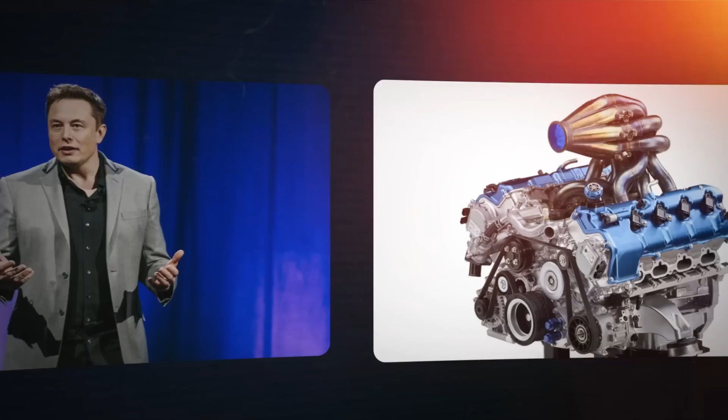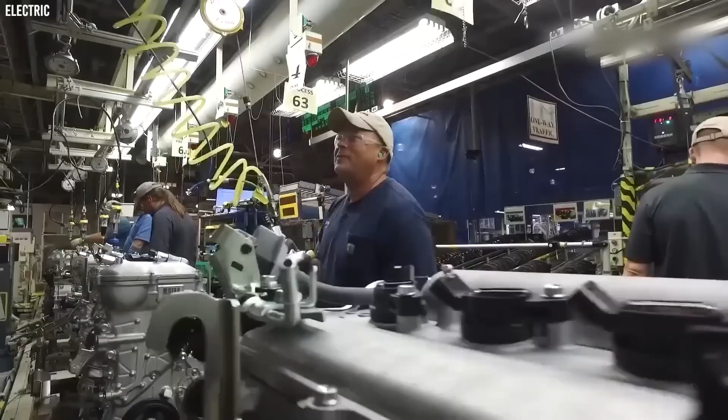In a groundbreaking announcement, Elon Musk has unveiled a revolutionary new water engine that promises to transform the future of transportation and energy. After years of skepticism and countless innovations, Musk's latest venture sets the stage for unprecedented environmental sustainability. But what makes this water engine so unique, and how will it impact our world? Join us as we dig into the mechanics of Musk's incredible invention and explore the far-reaching implications of this game-changing technology.

Elon Musk abruptly announced a big change in Tesla's course on X, formerly known as Twitter, in an unexpected turn of events. Following years of doubt regarding hydrogen fuel cells, Musk declared that Tesla will switch from battery power to hydrogen power, which represented a significant shift in the business plan. This announcement caught many by surprise, given Musk's previous criticism of hydrogen fuel cells, which he famously called 'fool cells.'

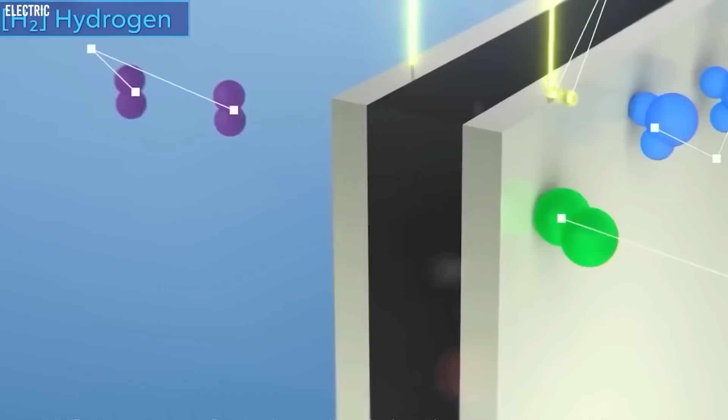The shift was driven by challenges faced in mass-producing the 4680 battery cells, prompting Tesla to reconsider its approach to sustainable energy solutions. But Musk didn't stop there. He revealed that Tesla's latest innovation, the revolutionary water engine, would be at the forefront of this transition. This groundbreaking technology promises to redefine how we think about engines, offering unprecedented environmental benefits and performance.

So what makes this water engine so revolutionary? How will it impact the automotive industry and beyond?

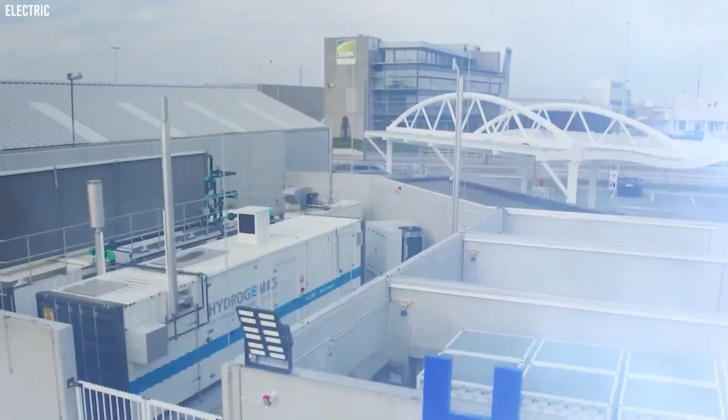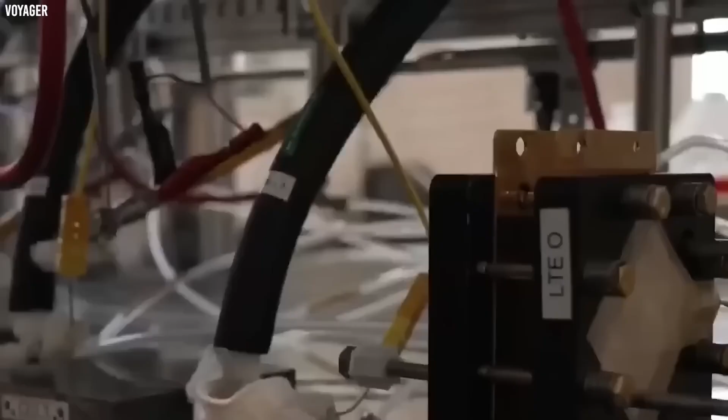Elon Musk, the visionary behind Tesla and SpaceX, has always been driven by a commitment to cutting-edge technology and environmental sustainability. His goal is to create a future where technology enhances our lives while protecting the planet. Musk's relentless pursuit of innovation has consistently pushed the boundaries of what's possible, earning him a reputation as a modern-day pioneer.

Musk's vision for Tesla wasn't just about creating electric cars, but about transforming the entire automotive industry. He aimed to prove that electric vehicles could be faster, safer, and more enjoyable to drive than their gasoline counterparts. This mission was about more than just cars - it was about accelerating the world's transition to sustainable energy.

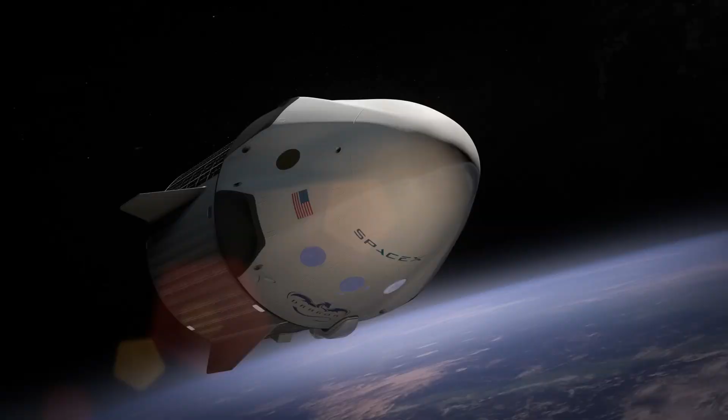With SpaceX, Musk's ambitions extended beyond Earth. He envisioned making space travel more affordable and accessible, ultimately aiming to colonize Mars. SpaceX's achievements, such as the successful landing and reuse of rockets, have revolutionized the space industry, demonstrating Musk's ability to turn ambitious dreams into reality.

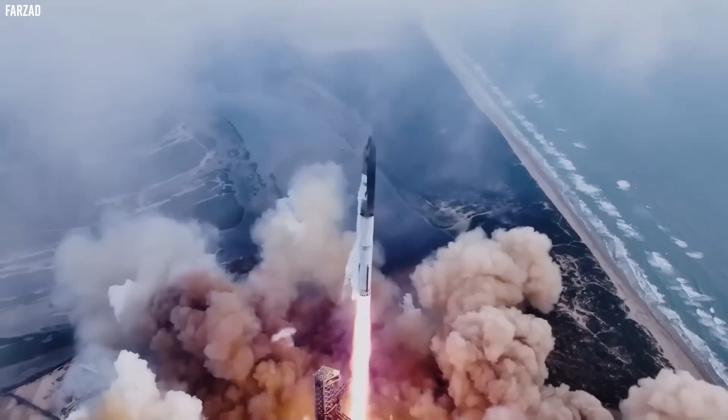Musk's journey in renewable energy and transportation is marked by several key milestones. Tesla, founded in 2003, initially faced skepticism - electric cars were considered impractical and inefficient. Musk's perseverance paid off. The Roadster, Tesla's first vehicle, showcased the potential of electric cars with its impressive performance and range.

The subsequent releases of the Model S, Model X, Model 3, and Model Y have solidified Tesla's position as a leader in the electric vehicle market. Each model brought advancements in battery technology, driving range, and autonomous driving capabilities, making electric cars increasingly viable for everyday use.

Beyond vehicles, Musk's contributions to renewable energy are significant. Tesla's Powerwall and solar roof products are designed to create a sustainable energy ecosystem for homes and businesses. By integrating solar energy generation with efficient energy storage, Musk has provided practical solutions for reducing dependence on fossil fuels.

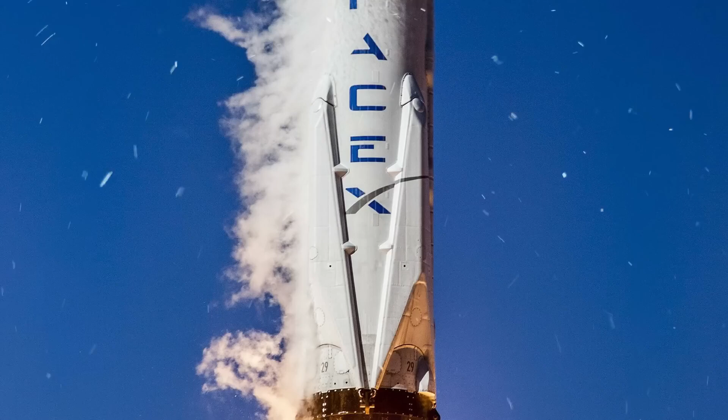In the realm of space travel, SpaceX has achieved remarkable milestones. The Falcon 9 rocket's ability to land and be reused has dramatically reduced the cost of space missions. The successful deployment of the Starlink satellite constellation aims to provide global internet coverage, further emphasizing Musk's far-reaching impact on technology and innovation.

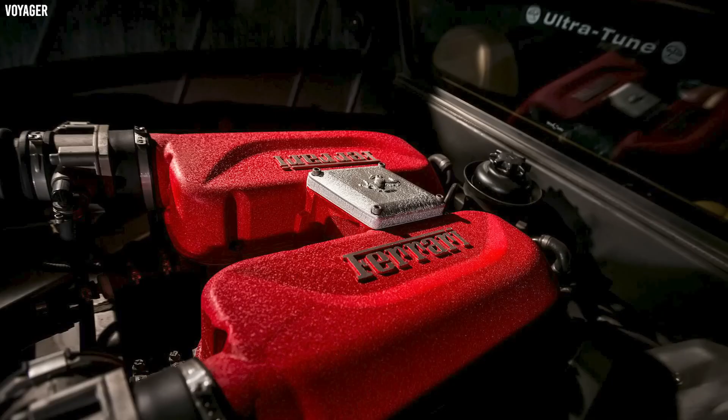The water engine operates on a simple yet ingenious principle: it uses water to generate energy. This process fundamentally separates it from traditional combustion engines, which rely on burning fossil fuels, and from electric engines that depend on battery power. But how does the water engine work?

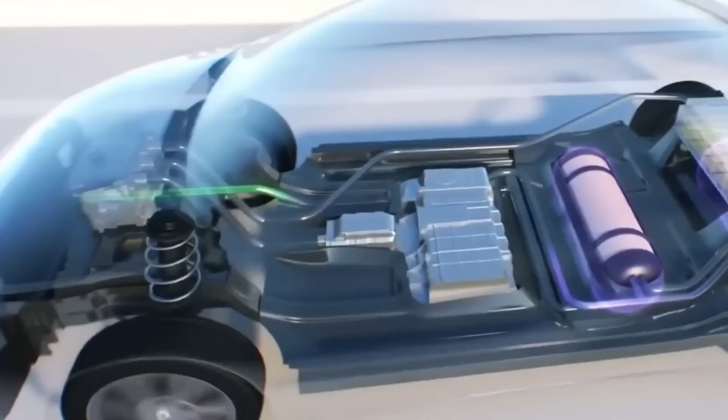At its core, the engine uses a method called reverse electrolysis. In conventional electrolysis, electricity is used to split water, H2O, into hydrogen, H, and oxygen, O. In reverse electrolysis, the process is flipped - hydrogen and oxygen are combined to produce electricity, and the only byproduct is water vapor, making this an exceptionally clean technology.

So what are the mechanics behind this impressive technology? The water engine's mechanics are a blend of fuel cells, reverse electrolysis, and hydrogen-oxygen reactions. Let's break it down step by step. First, water is introduced into the system. The engine then splits the water into hydrogen and oxygen using an initial energy input. These gases are stored in separate tanks within the vehicle.

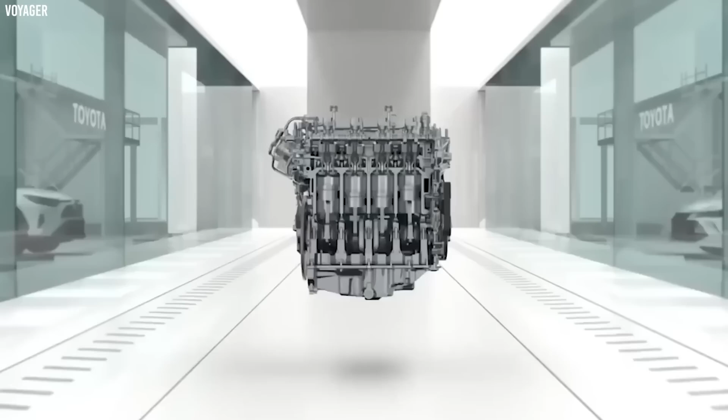When the engine is running, hydrogen from the tank is fed into the fuel cell. In the fuel cell, hydrogen molecules are split into protons and electrons. The electrons are used to create an electric current, which powers the vehicle's electric motor.

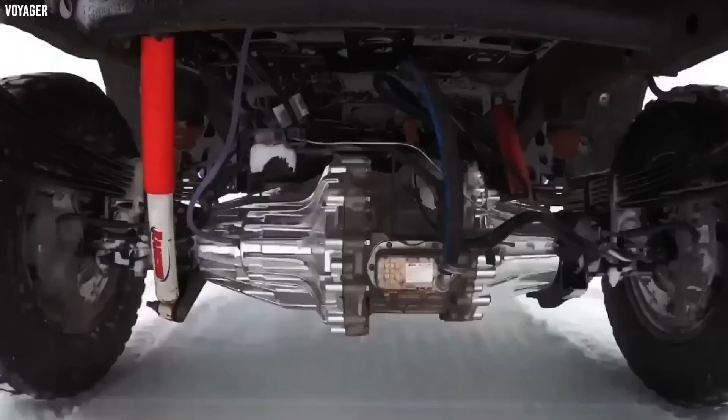Meanwhile, the protons move through a membrane and combine with oxygen from the air, producing water vapor as the only emission. This process is incredibly efficient, continuously generating electricity as long as there is hydrogen and oxygen available.

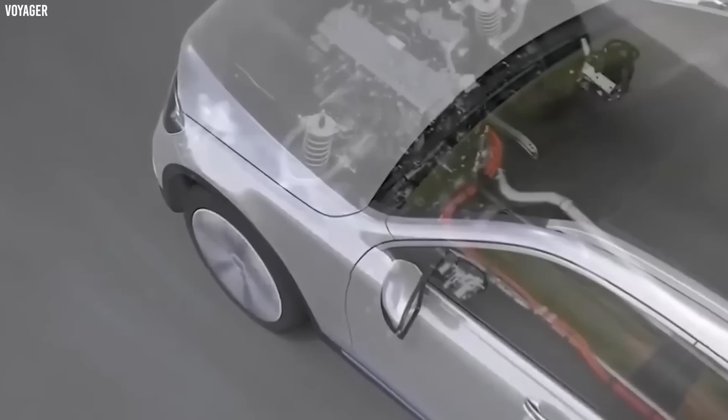But how efficient is the water engine compared to traditional and electric engines? The answer is quite promising. Traditional combustion engines have an efficiency rate of about 20 to 30%, meaning a significant amount of energy is lost as heat. Electric engines, while more efficient at around 85 to 90%, still face challenges like long charging times and battery degradation. The water engine, however, boasts an efficiency of approximately 60%, placing it between combustion and electric engines.

More importantly, it offers a cleaner, more sustainable alternative. Another critical performance metric is range. Traditional electric vehicles, EVs, often suffer from range anxiety, with current models typically offering between 200 to 300 miles per charge.

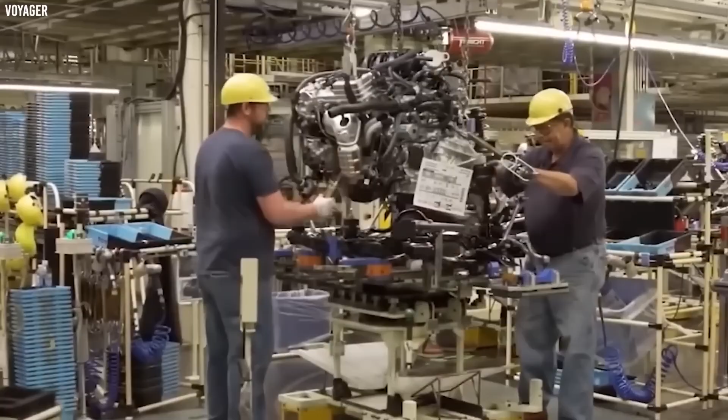The water engine, leveraging the high energy density of hydrogen, can achieve ranges comparable to or even exceeding those of fossil fuel-powered vehicles. Imagine driving a car that emits only water vapor and never worrying about running out of power in the middle of a trip.

So, what makes the water engine so unique? Unlike electric vehicles that require lengthy charging sessions, the water engine can be refueled quickly, similar to gasoline vehicles. This convenience, combined with its environmental benefits, positions the water engine as a game changer in the automotive industry.

One of the most significant advantages of the water engine is its potential to drastically reduce our carbon footprint. Traditional combustion engines emit large amounts of carbon dioxide and other pollutants, contributing to climate change and air pollution. In contrast, the water engine produces only water vapor as a byproduct, making it an exceptionally clean alternative.

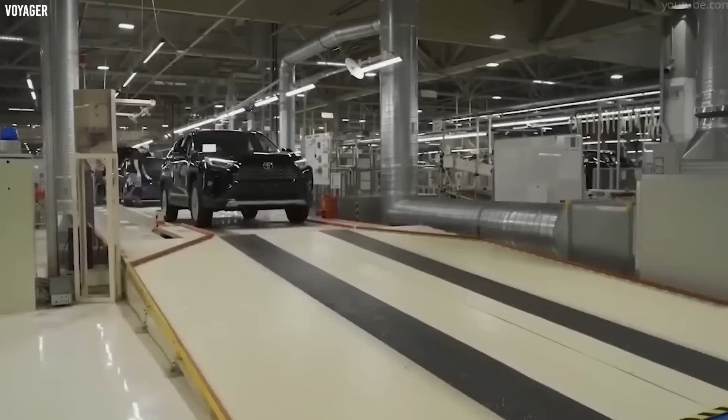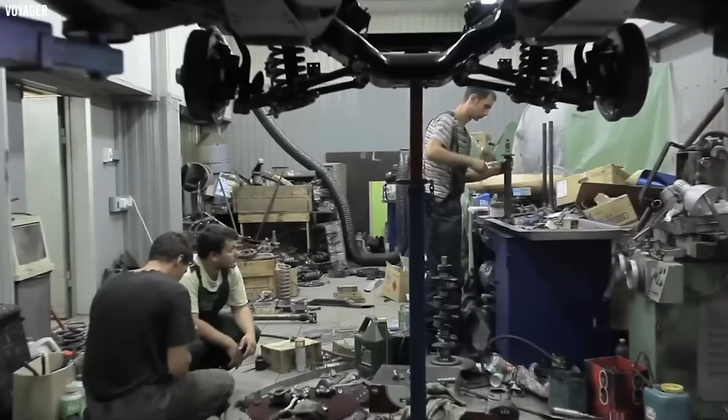To put this into perspective, the average gasoline-powered car emits about 4.6 metric tons of carbon dioxide annually. Transitioning to water engines could eliminate these emissions entirely. Moreover, the elimination of nitrogen oxides and particulate matter would lead to significant improvements in air quality, particularly in urban areas. Comparatively, electric vehicles, EVs, are also cleaner than fossil fuel-powered cars, but are not without their environmental costs.

The mining of lithium, cobalt, and other rare earth metals required for batteries has substantial ecological impacts. Additionally, if the electricity used to charge EVs is sourced from non-renewable power plants, the overall reduction in carbon emissions is less pronounced. Hydrogen fuel cells represent another clean alternative,

producing only water as a byproduct. The production of hydrogen typically involves natural gas, resulting in indirect carbon emissions. Additionally, hydrogen storage and transportation pose challenges due to its low energy density and the need for high-pressure tanks.

The water engine, utilizing reverse electrolysis, has the potential to offer a more efficient and environmentally friendly solution. By using renewable energy sources to produce hydrogen, the entire life cycle of the water engine becomes sustainable, further reducing its environmental footprint. Economically, the water engine could bring substantial cost savings in the long run.

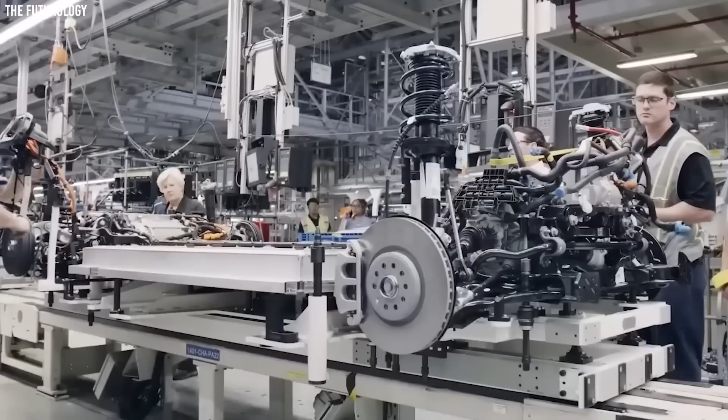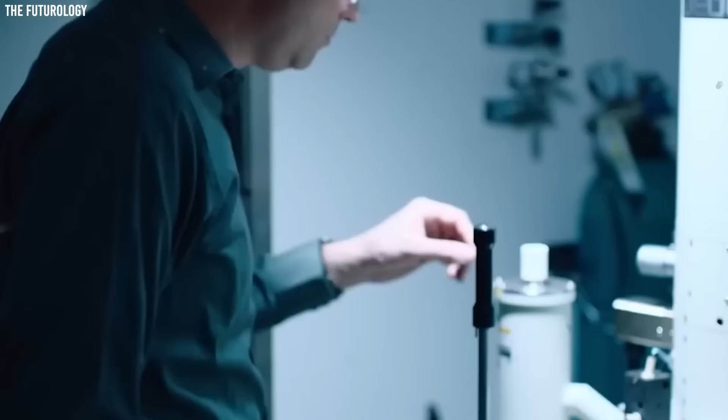Traditional internal combustion engines require regular maintenance, including oil changes, exhaust system repairs, and engine tune-ups, which can be expensive over time. Electric vehicles have fewer moving parts, reducing maintenance costs, but still require battery replacements, which can be costly and environmentally taxing. The water engine, with its simpler mechanics and fewer moving parts, promises even lower maintenance costs.

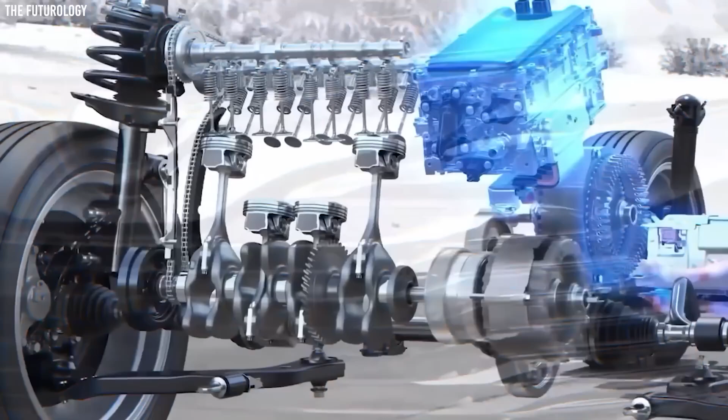Components like fuel cells and electrolysis systems are designed for durability, potentially extending the lifespan of vehicles. As the technology matures and economies of scale are realized, the initial cost of water engine vehicles could decrease significantly, making them more accessible to the average consumer.

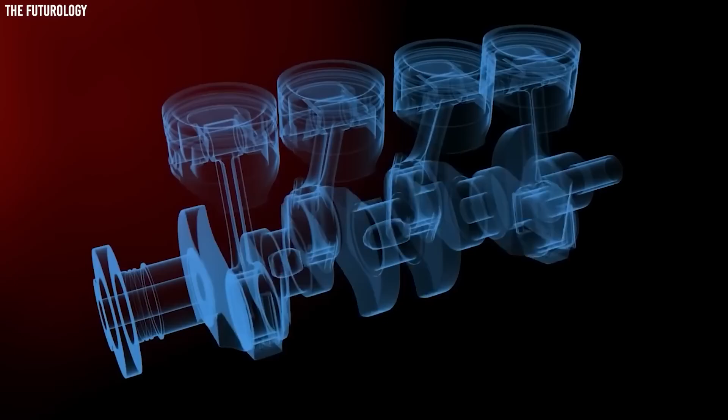However, the transition to water engines will require significant initial investment. Developing the infrastructure for water refueling stations is a massive undertaking. This involves either building new stations or retrofitting existing ones to accommodate water refueling technology. The cost and logistics of establishing a widespread network of refueling stations will require substantial collaboration between governments and private companies.

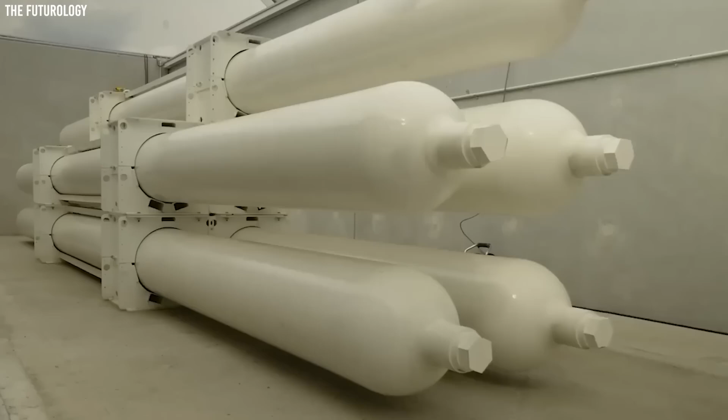On a broader economic scale, the adoption of water engines could reduce global dependence on oil, leading to more stable fuel prices and potentially reducing geopolitical tensions linked to oil supply. This shift could stimulate job creation in new industries focused on water engine technology, manufacturing, and infrastructure development.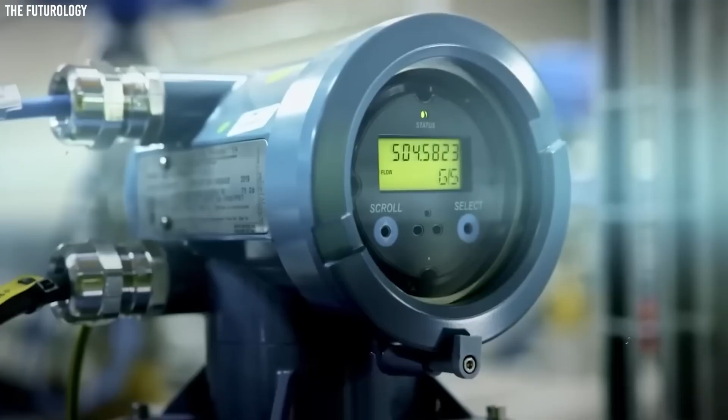The introduction of the water engine represents a significant technological shift in the automotive industry. Transitioning from combustion engines and electric vehicles to water engines involves overcoming various challenges. The current automotive infrastructure is fully rooted in fossil fuels, from manufacturing processes to refueling networks.

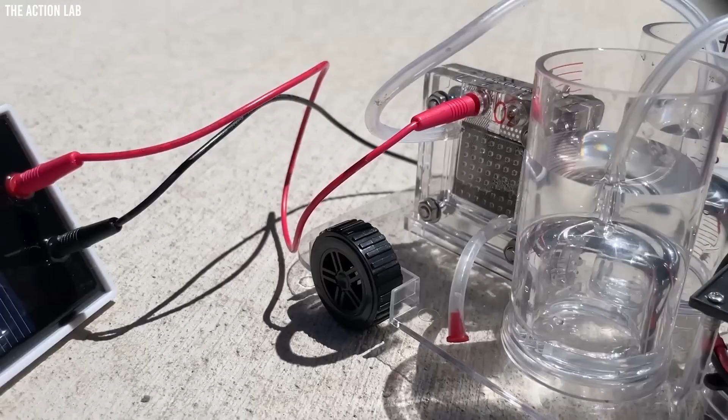To address these challenges, companies can leverage existing technologies and expertise. For example, many principles from hydrogen fuel cell technology, such as fuel cell design and hydrogen storage, can be applied to water engines. This can facilitate faster development and deployment of the new technology. But what does the future hold for Musk's water engine?

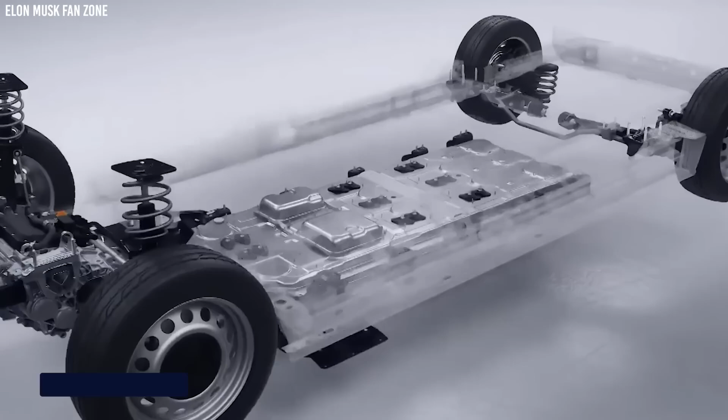Will it redefine our approach to energy and transportation, or will it face insurmountable obstacles? The automotive industry has watched Musk's announcement with keen interest. Major players like Toyota and Hyundai, longtime advocates of hydrogen fuel cell technology, have had mixed reactions.

They see it as a positive step towards wider acceptance and investment in hydrogen infrastructure. Hyundai, on the other hand, is cautiously optimistic, recognizing the competitive push, but also the significant market development needed to support both hydrogen and water engine technologies.

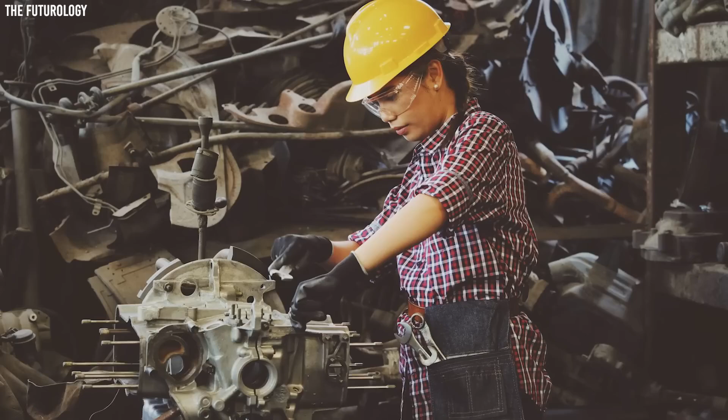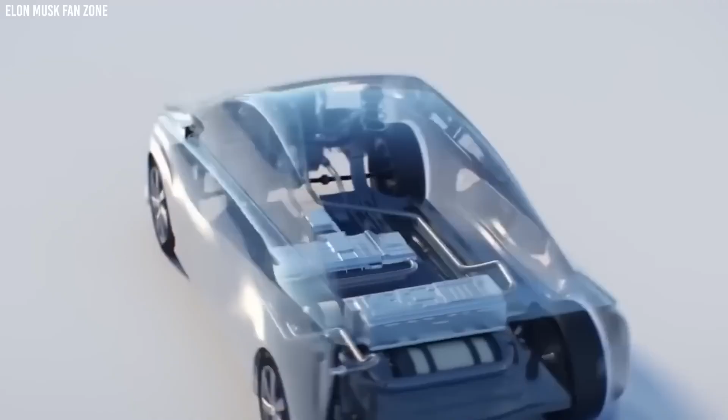The feasibility of the water engine has been discussed by analysts and industry specialists. While some regard it as a groundbreaking move that could hasten the switch to sustainable energy, others are dubious about the real-world difficulties. The technology's efficiency, the infrastructure needed for water refueling, and the viability of widespread adoption economically are among the issues raised. Public reaction to Musk's announcement has been a mix of excitement, curiosity, and skepticism.

Social media platforms have been abuzz with discussions as followers of Musk and Tesla enthusiasts express their anticipation for the new technology. Many are intrigued by the promise of a cleaner, more efficient engine and the potential environmental benefits. However, there are also doubts and concerns.

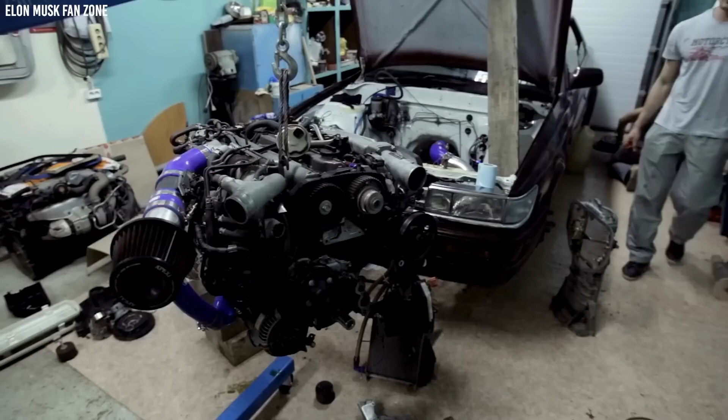Some critics point out Musk's past criticisms of hydrogen and question the feasibility of a rapid transition to water engines. They worry about the practicality of building a new refueling infrastructure and the initial costs associated with adopting the technology. So, will Musk's water engine prove to be the game changer it promises?

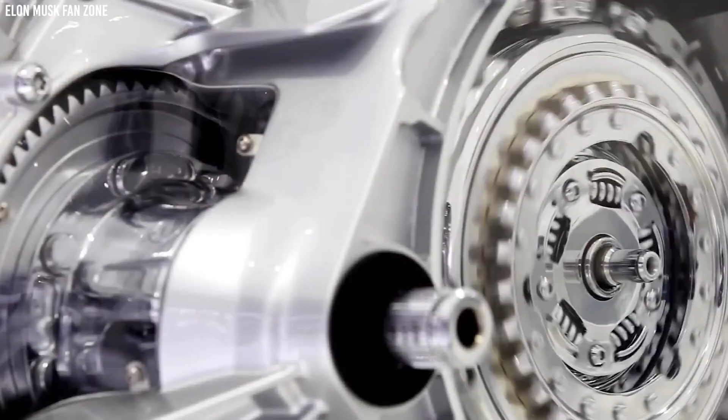One of the most significant challenges in deploying the water engine is the development of a comprehensive refueling infrastructure. Currently, the infrastructure for traditional fossil fuels is extensive, with gas stations available in almost every corner of the globe. Electric vehicle charging networks are also expanding rapidly, thanks in large part to investments by Tesla and other companies.

In contrast, the infrastructure for hydrogen fuel cells is still in its infancy. There are relatively few hydrogen refueling stations worldwide, concentrated mainly in specific regions like California, Japan, and parts of Europe. For water engines, which rely on a similar hydrogen-based refueling process, this existing network provides a starting point, but significant expansion is required.

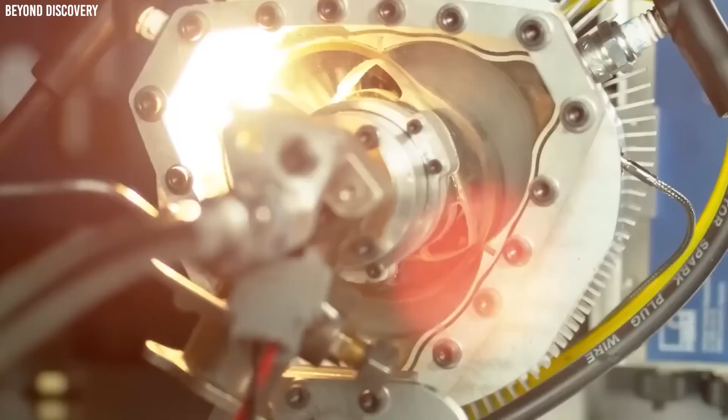Tesla's approach to solving this involves leveraging its experience in building out EV supercharging stations. The company plans to retrofit existing EV stations with hydrogen refueling capabilities and build new stations dedicated to water engines. This ambitious plan will require substantial investment and collaboration with governments and private sector partners to ensure widespread availability and convenience for consumers.

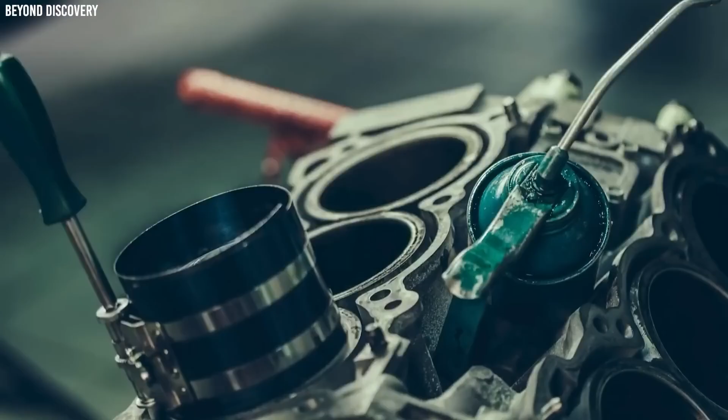But how quickly can this network be established? What are the logistical and financial hurdles that need to be overcome? These questions are critical as Tesla moves forward with its water engine rollout.

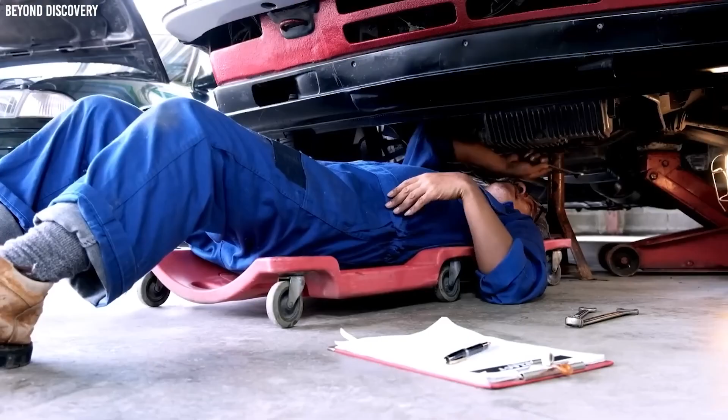Safety is another paramount concern when introducing a new technology. Hydrogen, while a clean energy source, is highly flammable and must be handled with care. The water engine, relying on hydrogen, inherits these safety challenges.

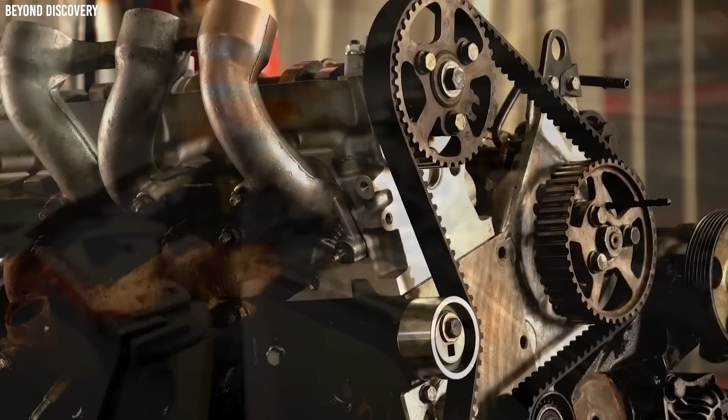To address these potential risks, Tesla has implemented several safety measures. First, advanced hydrogen storage systems have been developed to ensure that hydrogen is stored safely and securely within the vehicle. These systems are designed to withstand high pressure and prevent leaks.

Tesla's rigorous testing procedures for the water engine and hydrogen storage systems aim to meet and exceed safety standards set by international regulatory bodies. By prioritizing safety at every stage of development and deployment, Tesla is committed to making the water engine as reliable and secure as possible.

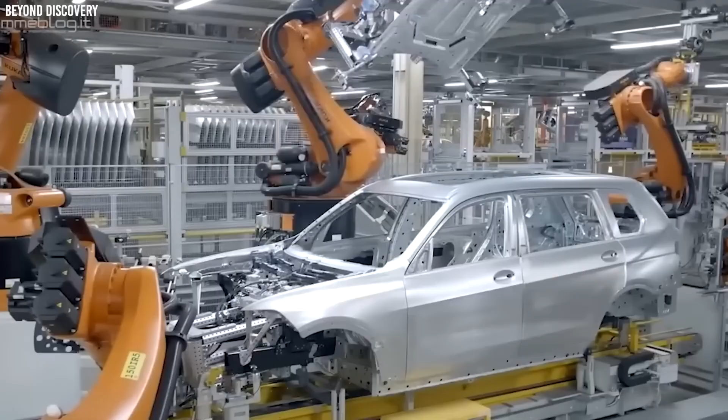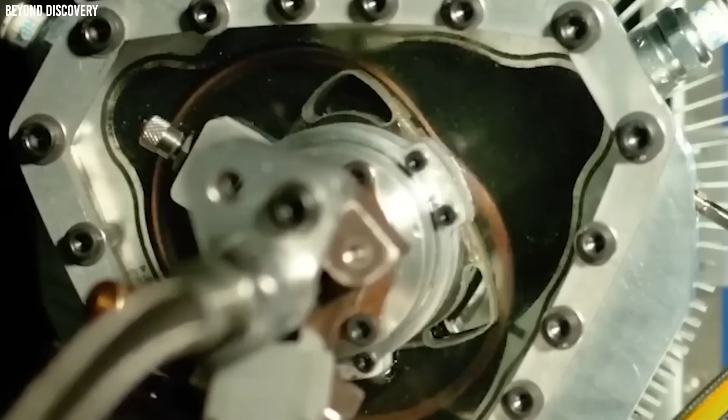But can these safety measures alleviate public concerns? What additional steps can be taken to ensure the technology is perceived as safe and trustworthy?

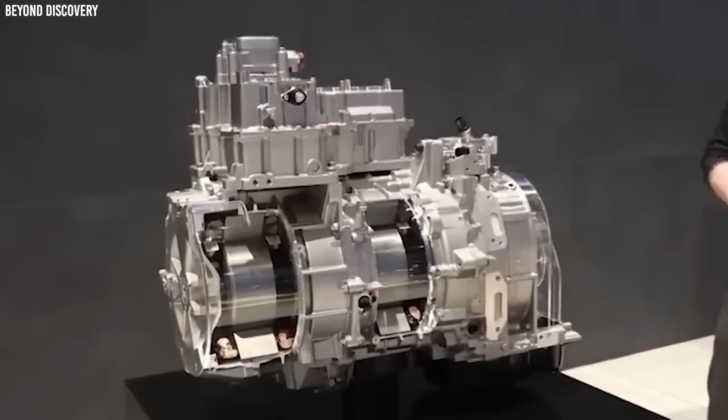Navigating the complex legal and regulatory landscape is another significant challenge for Tesla's water engine. Different countries have varying regulations regarding the production, storage, and transportation of hydrogen, adding layers of complexity to the global rollout of this technology. Tesla has proactively engaged with regulatory authorities worldwide to ensure compliance with all relevant standards.

This involves extensive documentation, rigorous testing, and ongoing dialogue with regulators to address any concerns and adapt to evolving requirements. These efforts are crucial in overcoming regulatory hurdles, but what are the specific challenges in different regions? How will Tesla's proactive approach influence the adoption of this new technology on a global scale?

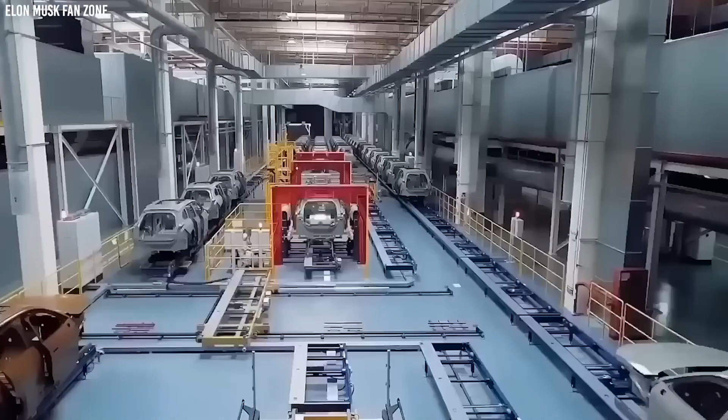Each technology has its unique strengths and weaknesses. Hydrogen fuel cells offer high energy density, allowing for long driving ranges and quick refueling times. They emit only water vapor, making them environmentally friendly. However, challenges arise in producing, storing, and transporting hydrogen gas, which is highly flammable and requires specialized infrastructure.

Water engines present a notable advantage with on-demand hydrogen production, potentially simplifying storage and minimizing risks associated with hydrogen gas handling. Additionally, this method can integrate well with renewable energy sources, enhancing sustainability.

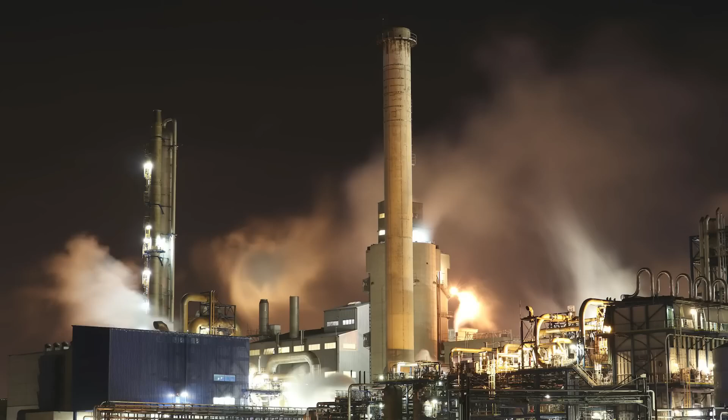However, the electrolysis process requires significant initial energy input, which can affect overall efficiency.

The market potential for water engines appears promising but challenging. The automotive industry is keen on reducing carbon emissions and adopting sustainable energy sources. Governments worldwide are setting strict emissions targets and offering incentives for clean energy technologies, creating a favorable environment for innovation. Forecasting adoption rates involves evaluating technological advancements, infrastructure development, and consumer acceptance.

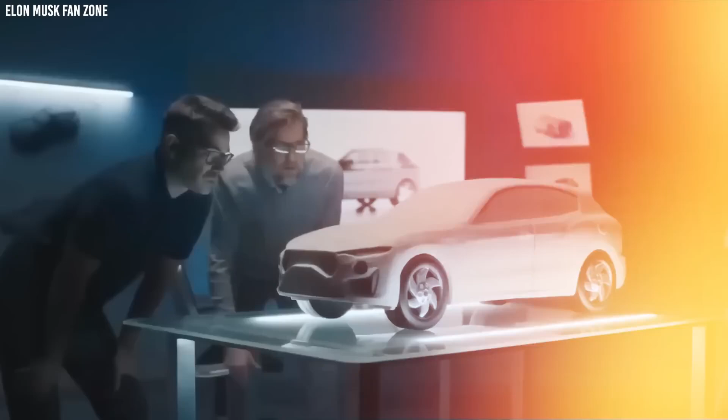Initially, water engines may appeal to early adopters and environmentally conscious consumers. As technology improves and costs decrease, broader adoption is likely. According to analysts, water engines could gain substantial market share in the next 10 years if Tesla can resolve the issues with efficiency and infrastructure.

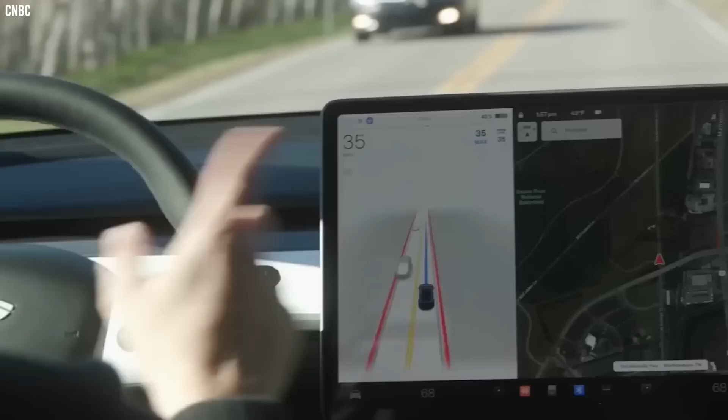To scale up manufacturing and deployment, partnerships with the public and commercial sectors will be essential. But what will it take for water engines to truly revolutionize the transportation industry? How will they compete with established technologies and navigate the evolving landscape of sustainable energy?

The journey of engine technology began with the invention of the steam engine in the late 17th century. Thomas Newcomen and James Watt improved steam engines, revolutionizing transportation and industry. These early engines were crucial in driving the Industrial Revolution, powering locomotives, ships, and factories.

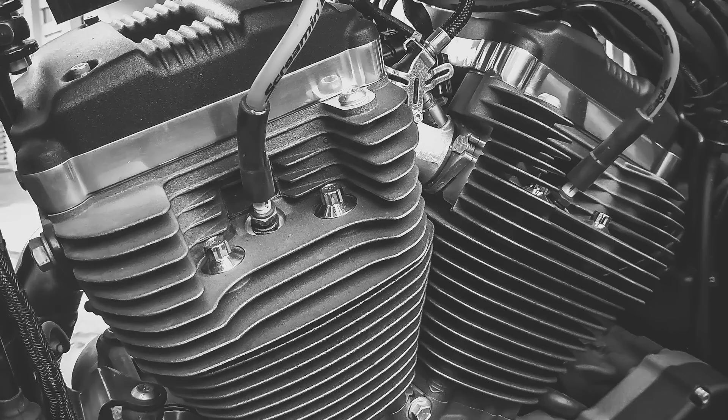In the late 19th century, the internal combustion engine emerged, developed by inventors like Nikolaus Otto and Rudolf Diesel. Otto's four-stroke engine and Diesel's compression ignition engine became the foundation for modern gasoline and diesel engines. These engines offered greater efficiency and power, leading to their widespread adoption in automobiles, aircraft, and ships.

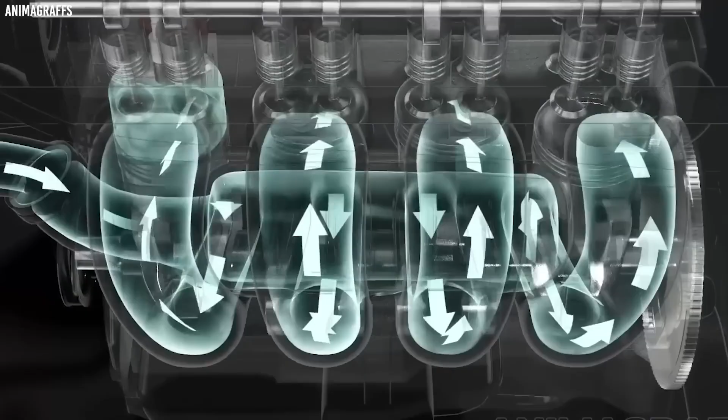The 20th century saw significant refinements in internal combustion engines, with advancements in materials, fuel injection systems, and turbocharging. These improvements enhanced performance, fuel efficiency, and emissions control, making internal combustion engines the dominant force in transportation. As concerns about pollution and fossil fuel depletion grew, the search for alternative fuel engines intensified.

This brings us to the late 20th and early 21st centuries, where electric vehicles, EVs, began to gain traction. Companies like Tesla, under Musk's leadership, spearheaded the EV revolution with advancements in battery technology, range, and charging infrastructure. Before Musk's water engine, there have been numerous attempts to develop alternative fuel engines.

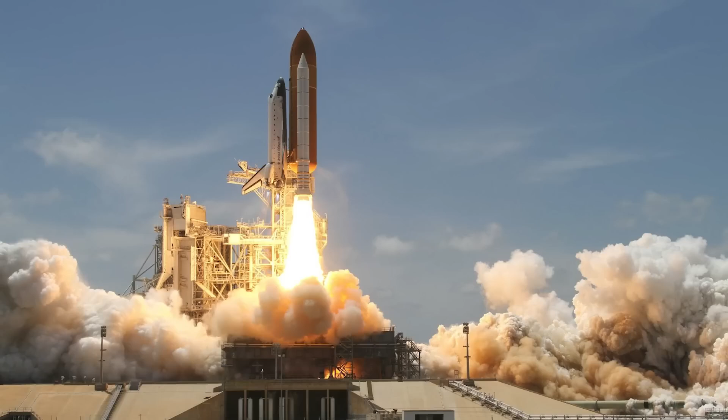One notable effort was the development of hydrogen fuel cells. In the 1960s, NASA used hydrogen fuel cells to power spacecraft in the Apollo missions, demonstrating the technology's potential. However, commercial adoption faced significant hurdles, including hydrogen production, storage, and infrastructure challenges.

Another notable attempt was the development of biofuel engines. In the early 2000s, there was a surge in interest in biofuels, such as ethanol and biodiesel, derived from plants and organic waste. While biofuels offered a renewable energy source, they also faced challenges. The production of biofuels required large amounts of agricultural land and water, raising concerns about food security and environmental sustainability.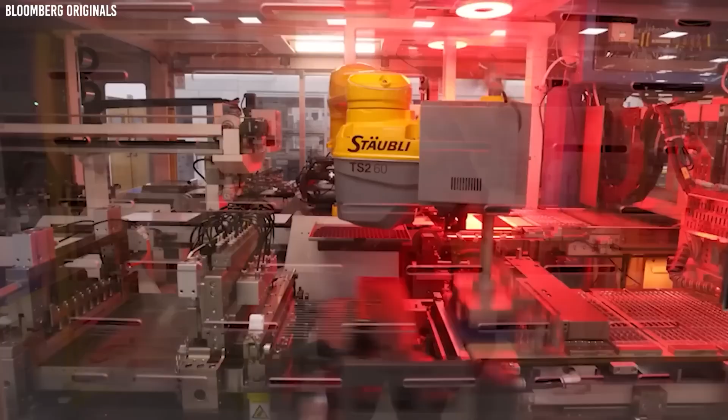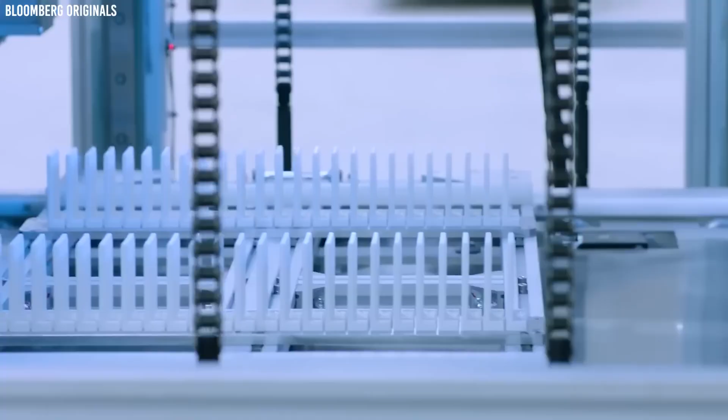Electric vehicles also represent a major shift in engine technology. Early EVs, such as General Motors' EV1 in the 1990s, showcased the potential of electric propulsion. However, limited range, high costs, and inadequate charging infrastructure hindered widespread adoption. It wasn't until advancements in lithium-ion batteries and the establishment of extensive charging networks that EVs began to thrive.

The history of alternative fuel engines offers valuable lessons that inform Musk's current project. One key lesson is the importance of infrastructure. Hydrogen fuel cells and early EVs struggled with infrastructure challenges. Musk's plan to leverage Tesla's existing supercharger network for hydrogen refueling addresses this critical barrier.

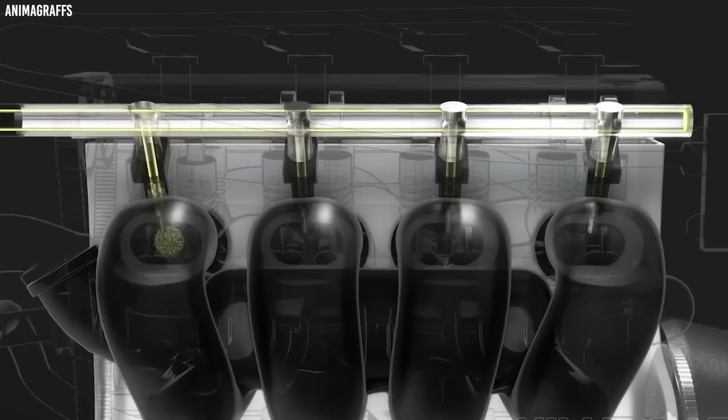A further lesson pertains to the importance of energy efficiency. Despite being renewable, biofuels frequently used more energy during production than they produced. Musk wants to maximize energy efficiency by focusing on reverse electrolysis in the water engine, making sure that the process of splitting water and recombining hydrogen and oxygen is as effective as possible.

So how does Musk's water engine fit into this historical context? It represents the latest evolution in the ongoing quest for cleaner, more sustainable engine technology. By building on the successes and learning from the challenges of past innovations, Musk is pushing the boundaries once again.

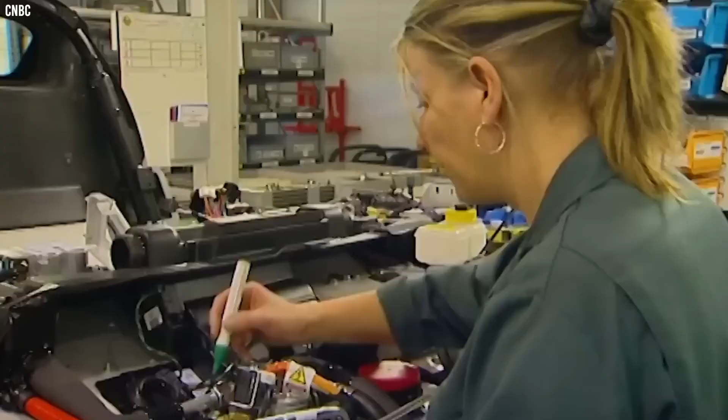A number of businesses and innovations could compete with Tesla's water engine. The Nikola Corporation specializes in trucks that run on hydrogen. In spite of numerous setbacks, Nikola has made significant strides toward creating heavy-duty vehicles that run on hydrogen fuel cells. Their emphasis on the business market may give Tesla fierce rivalry, particularly in long-distance travel.

BMW is also exploring hydrogen fuel cell technology, having unveiled prototypes and committed to further research. With their strong brand and engineering prowess, BMW could present a formidable challenge to Tesla's water engine, particularly in the luxury vehicle market.

Rivian, an electric vehicle startup backed by major investors like Amazon and Ford, represents another competitive force. While Rivian currently focuses on electric vehicles, their innovative approach and substantial funding could enable them to pivot towards water engine technology if the market demands.

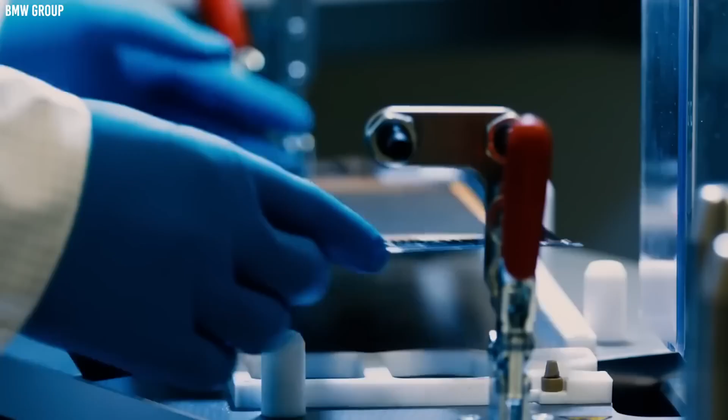Working together is essential to the quick development and widespread use of water engines. Tesla has a track record of establishing tactical alliances to further its technological objectives. Gaining access to cutting-edge research, specialist knowledge, and cutting-edge technology can be accomplished by partnering with top tech businesses, universities, and research organizations. For instance, collaborations with universities focused on hydrogen research can help Tesla refine the efficiency and performance of its water engine. Partnerships with tech giants like Google or Apple could integrate advanced software and AI capabilities, enhancing the overall functionality and user experience of water engine vehicles.

So, how will these collaborations shape the future of transportation? Will Tesla's partnerships pave the way for widespread adoption of water engines?

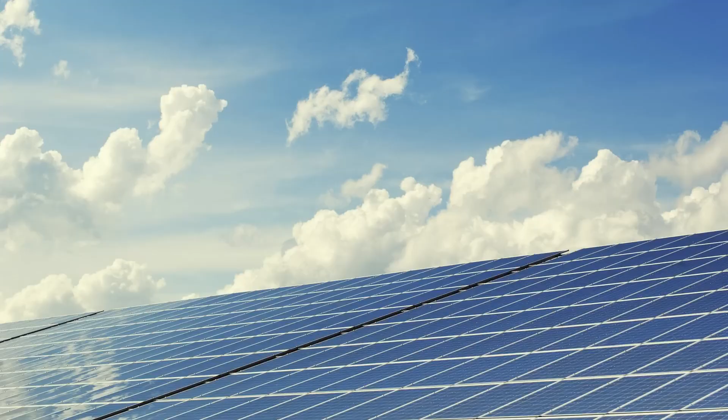The water engine's smooth integration with renewable energy sources like solar and wind power is one of its most exciting features. Utilizing electrolysis to create hydrogen using renewable energy, the water engine can run with very few carbon emissions. In order to produce hydrogen in a completely environmentally friendly manner, water is split into hydrogen and oxygen using electricity generated by solar panels or wind turbines.

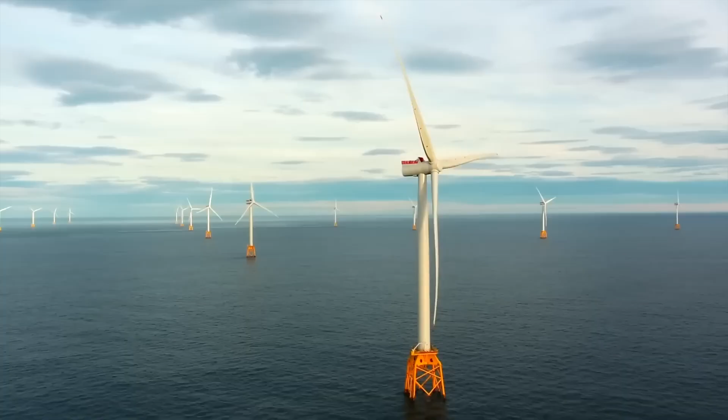Imagine a scenario where homes equipped with solar panels can generate hydrogen fuel during the day and use it to power water engine vehicles. Similarly, wind farms could provide both electricity for the grid and hydrogen for transportation, creating a synergistic relationship between renewable energy generation and sustainable transportation.

The impact on the energy grid could be transformative. Hydrogen production can serve as a form of energy storage, capturing excess energy during peak production periods and converting it back to electricity or fuel when demand is high. This ability to balance supply and demand can help stabilize the grid and enhance the reliability of renewable energy sources, even when natural conditions fluctuate.

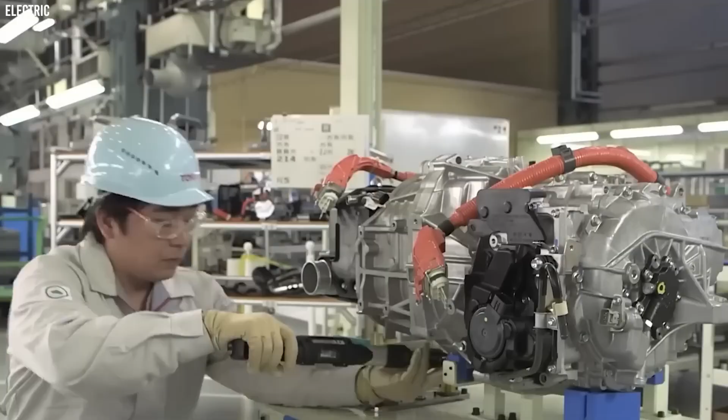Global sustainability initiatives could be considerably advanced if water engines are widely used. Water engines can significantly lower greenhouse gas emissions and air pollution by moving away from fossil fuels. A more sustainable planet, healthier communities, and cleaner air would all benefit from this shift.

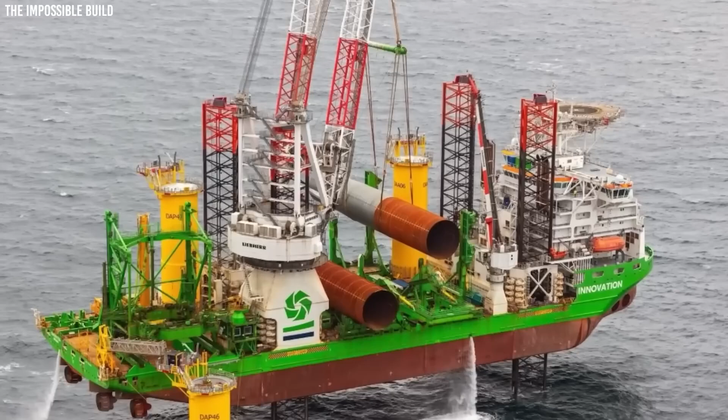Furthermore, the overarching objective of decarbonizing the energy system is supported by the integration of water engines with renewable energy sources. This technology has the potential to speed the transition to a totally sustainable energy environment by boosting the use of green hydrogen and encouraging the development of hydrogen infrastructure. When all of these initiatives are combined, the environmental impact of energy generation and transportation will be significantly reduced.

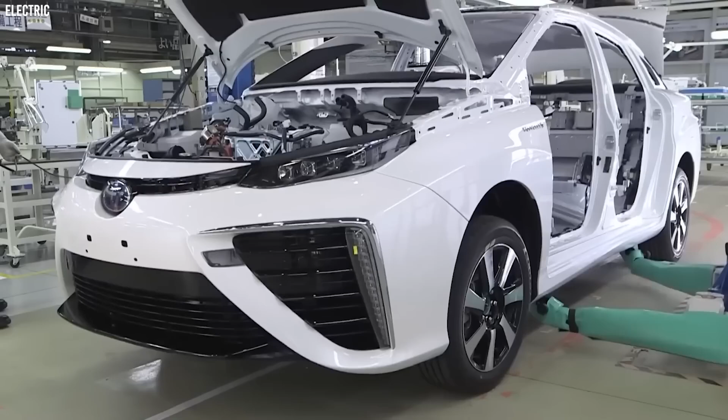Elon Musk's water engine could influence global energy policies. As countries seek to meet climate goals and reduce carbon emissions, the introduction of a viable, clean alternative to traditional engines may prompt substantial policy shifts.

The growth of refueling stations and the production of green hydrogen might be encouraged by government subsidies and tax breaks, which would increase support for hydrogen infrastructure. These regulations can also include incentives for consumers to buy hydrogen-powered cars and funding for research and development. The shift to renewable energy would be accelerated by these actions, which would promote universal adoption and infrastructure expansion.

The introduction of the water engine promises to dramatically enhance the driving experience for consumers. Unlike traditional internal combustion engines, which are known for their noise and vibrations, water engines, like electric vehicles, offer a quieter, smoother ride. This quieter operation enhances driving comfort and reduces noise pollution, making journeys more pleasant.

When it comes to performance, water engines are comparable to electric vehicles in that they provide quick acceleration and instant torque. Driving can be more enjoyable and effective with this instantaneous power response. Furthermore, drivers may enjoy excellent performance without feeling guilty about the environment like they would with traditional fuel sources because of the water engine's pure energy output.

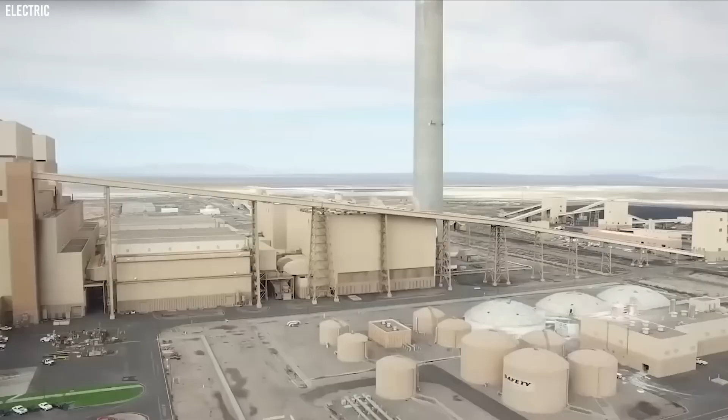Cost savings extend beyond maintenance. As the technology matures and economies of scale are realized, the initial cost of water engine vehicles is expected to decrease. Combined with potential government incentives and reduced fuel costs, consumers could find these vehicles financially attractive.

Beyond automobiles, the potential applications of water engines are huge. Tesla is exploring the use of this technology in aviation, where reducing carbon emissions is crucial. Imagine hydrogen-powered aircraft that offer the same environmental benefits as water engine cars, potentially transforming the aviation industry.

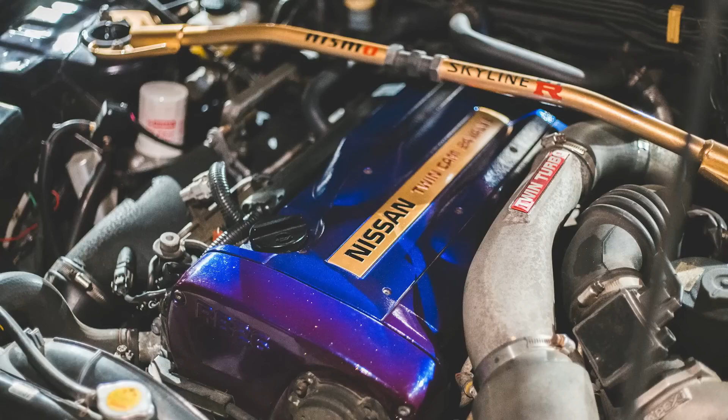Maritime applications are also on the horizon. Ships powered by water engines could significantly reduce the environmental impact of global shipping, contributing to cleaner oceans and air. In heavy industry, where energy demands are high, water engines could provide a sustainable alternative, reducing reliance on fossil fuels and cutting emissions.